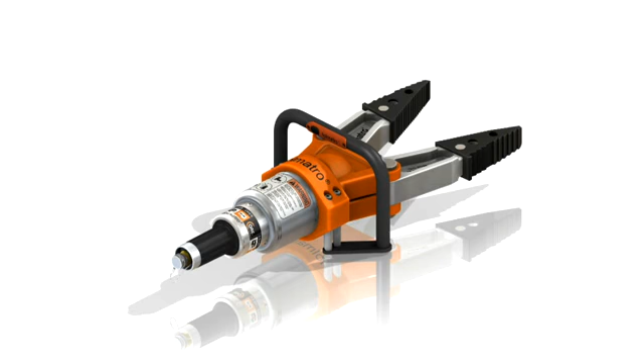This is your first look at SOLIDWORKS simulation. With rescue equipment like this, performance is everything. The product must work reliably every time. SOLIDWORKS contains a powerful set of tools we can use to test out the performance of a design in many different ways. Two key areas that concern most designers are function and strength. Let's look at how SOLIDWORKS Motion and SOLIDWORKS simulation tools can help us evaluate these goals.

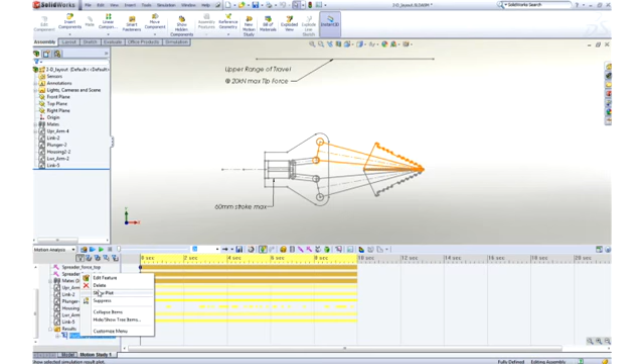We've seen how we can assemble our design in SOLIDWORKS, but how do we know it's going to function correctly? It's invaluable to be able to validate the spreader operation without the need to cut metal or build prototypes, like in the case of this sketch layout concept. With SOLIDWORKS Motion, we can easily test our design during the early stages of development to aid in sizing parts, bearings, motors, and actuators to ensure they meet our design goals. As we go through and refine our design, we can continue to use motion to validate the function.

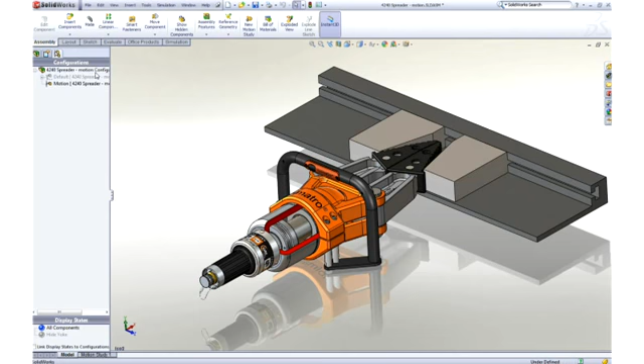Here we have a test fixture to determine the piston force required at different jaw openings to meet a minimum spreader force requirement. In SOLIDWORKS Motion, we need only apply an actuator to drive the piston through its range of movement, the desired spreader force on both blocks, and finally specify that the tips of the jaws and the blocks will contact. An accurate physics engine then calculates the resulting motion, forces, velocities, and accelerations.

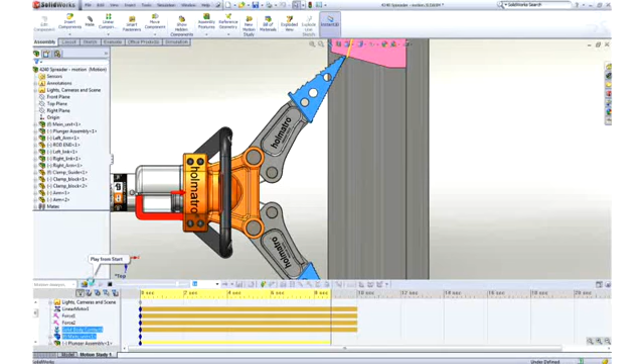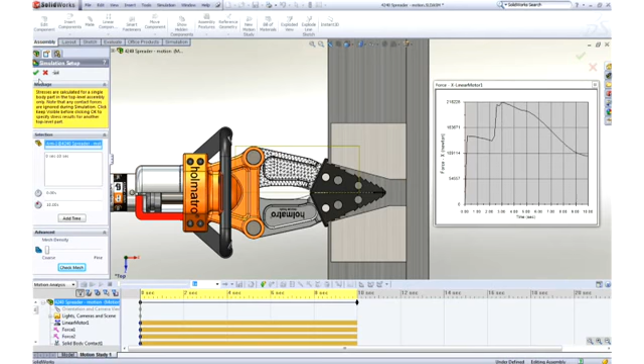We can look at a wealth of engineering data such as the bearing loads on the pins, how quickly parts are traveling, and so on. With the built-in plotting tool, we can quickly show the required piston force with respect to the open position. We're even able to check the strength of selected parts in the mechanism over the entire range of motion. This can really help in determining if we need to use SOLIDWORKS simulation for a more in-depth analysis to ensure that part strengths meet our goals.

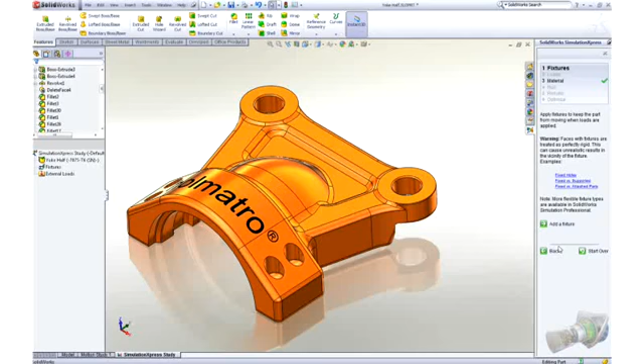Let's now focus in more detail on the structural aspects of our design with SOLIDWORKS simulation. If we're concerned about parts failing, deflecting too much, or reducing weight, this is the tool for the job. Simulation can be used from the part level all the way up to the complete assembly to easily identify if the design will meet our needs. You set up the model just like you would when doing an experiment in the lab. We start by using fixtures to hold a part in place. We make selections just by picking on geometry.

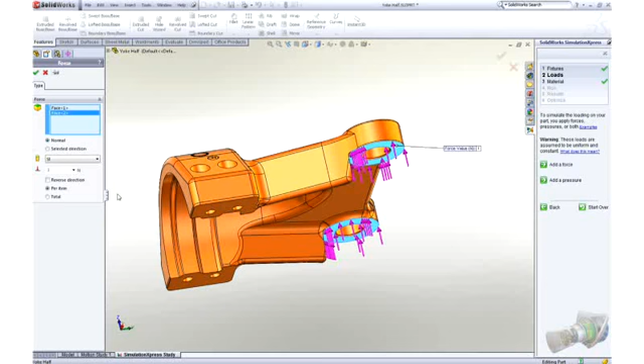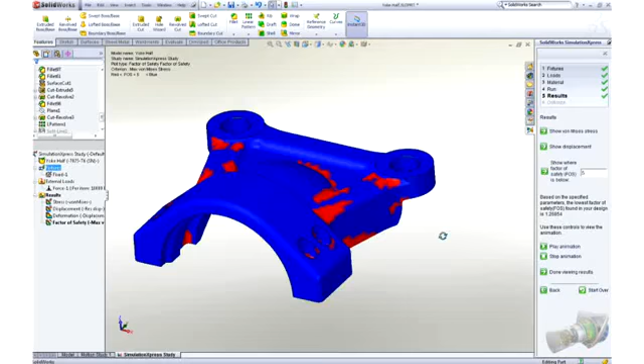It couldn't be simpler. We then apply loads to test if our part is going to fail or deflect too much. Visual feedback on the screen makes it very easy to understand how we've set up our test. The checklist on the right-hand side makes sure that you have everything ready to test out your design's performance. After the simulation has run, you get immediate visual feedback on how the part is trying to deflect, which is great to confirm the test is set up correctly. It's easy to verify the factor of safety, stress, and deflection of the component.

Simulation also allows you to look at many design variations very quickly with design studies. In this case, we want to optimize the pocket size to reduce the weight of the arms, but still ensure we meet the rigors of ripping open cars. The slider interface makes it incredibly easy to compare designs and find the right one to save the most weight.

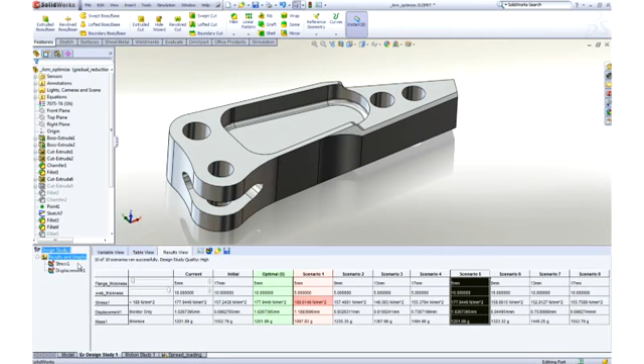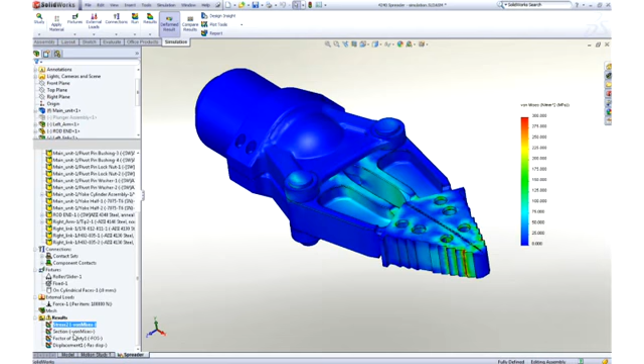SOLIDWORKS simulation also enables us to look at the entire design and understand how load is transferred between parts, as well as where the critical areas of the design are located. In this instance, we're looking at the loads through the entire spreader. A force has been applied to the hydraulic piston and the tips of the arms are being held in place. We're even able to slice through the model to look at any internal sections. Results update dynamically for immediate feedback.

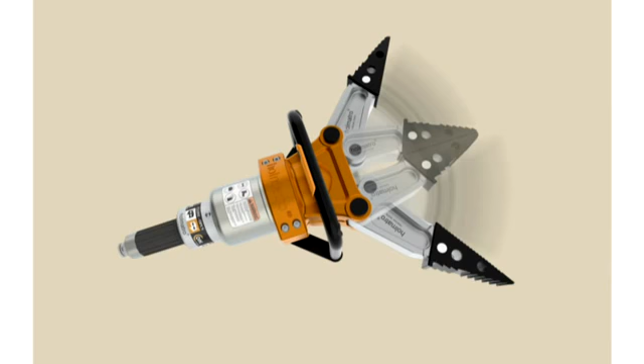With SOLIDWORKS simulation, you can even look at vibration, heat, material yield, durability, and many other types of tests. With SOLIDWORKS Motion and SOLIDWORKS simulation, you can test your designs before you build them, cutting down on prototypes, helping to make sure it will work the first time, and reduce the time it takes to reach production. This has been your first look at SOLIDWORKS simulation.